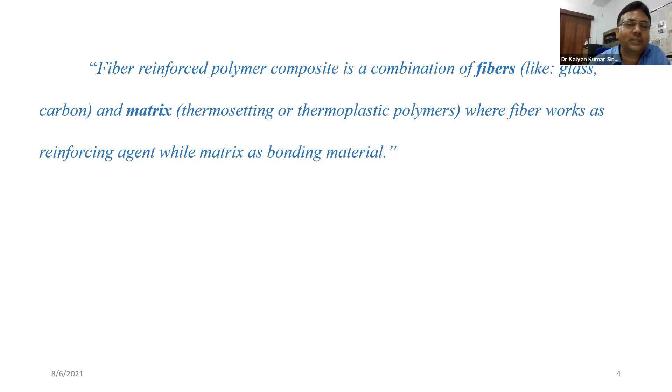If you look at matrix and reinforcements in composites, these are the two main constituents of composites. Why composites? As I told you just now, because we have limited natural resources, and we do not want to destroy them. So the answer is composites.

Whenever we talk about composites, they are advanced over traditional materials: high strength to weight ratio, good aspect ratio, and wide applications as advanced materials in industries like aerospace, aircraft, marine, and automobiles. There is a lot of design flexibility - whatever designs you want to create, you can do it.

You know that proverb: when a material scientist develops a material, who is the happiest person? The happiest person is the designer, because he can design as per his choice.

See all these parts, we are showing them for the automobile industries - all these small parts, you can make with this. Then you also have extended service life.

If you look at service life, it is also better in the case of composites. You know the fundamentals of the stress-strain diagram very well - the upper yield point, the lower yield point, ultimate point, and fracture point. What happens there? Once the material reaches the ultimate point, the fracture point, it is going to fail.

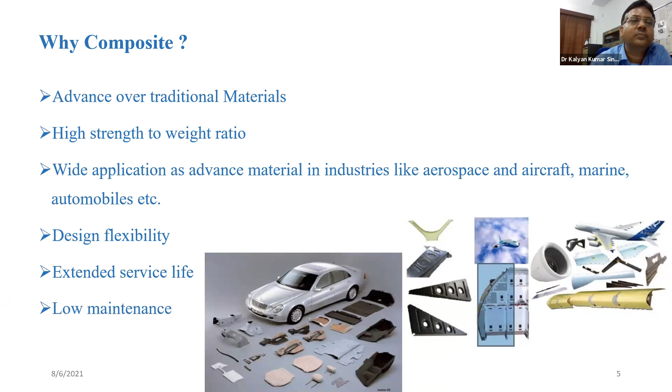Now see this impact - these happenings are practical examples I am showing you. Impact situation is a real life problem for aircraft, marine, automobile, and many more industries. Impact damage analysis can provide better design flexibility for components or structures with minimum risk of accident.

See the lower figure in this slide - this is a car, a Ford car. This happened in my campus, and I took this picture and put it in this slide. What will happen? They will go to the workshop and they can repair it. If it were a metallic material, they would have to change the complete part. Here, the designing and repair of this, everything becomes easy when we talk about this kind of part.

If you consider my earlier experience before joining CST, I worked for some time at Taneja Aerospace Industry as a material inspector.

All the flights with defects come there for repairs. Whatever parts they find damaged, they make those parts in their workshop and repair it. They have 3 industries, one based in Bangalore, one in Chennai, and the other in Nagpur. So that was the repair industry for flights.

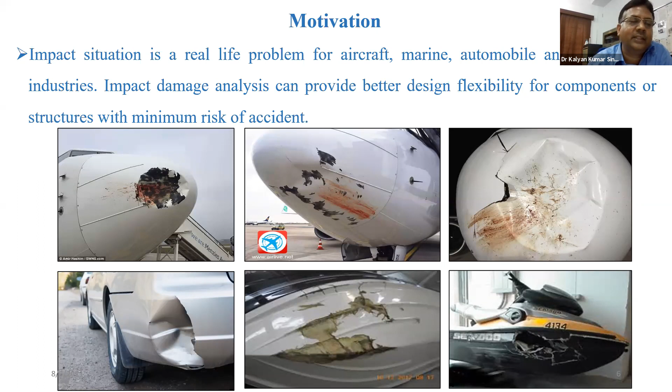So see this figure in front of you, we can easily repair this kind of incident if it happens with the flight or the automobiles.

Now, about composites and impact: a sudden instantaneous impulsive force on a limited area of composite laminates can be defined as impact. Based on the indentation velocity, impact can be divided into 2 categories: low velocity impact (LVI), high velocity impact, and also a third category, hyper velocity impact.

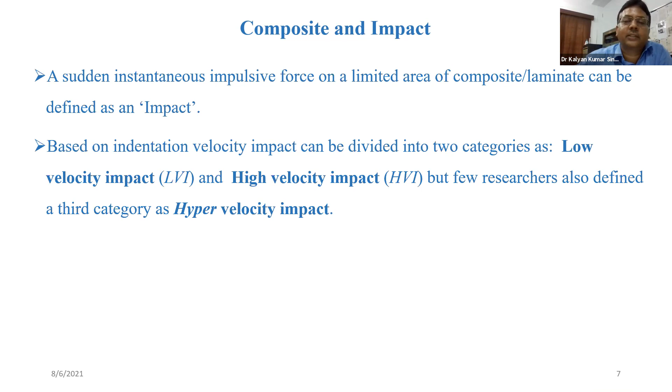A variety of failure modes can occur on impact damage, no doubt. If you recall the fracture mechanics approach, you know mode 1 and mode 2: opening mode, sliding mode, and tearing mode, and in which situations they may occur. A variety of these failure modes can occur on impact damage.

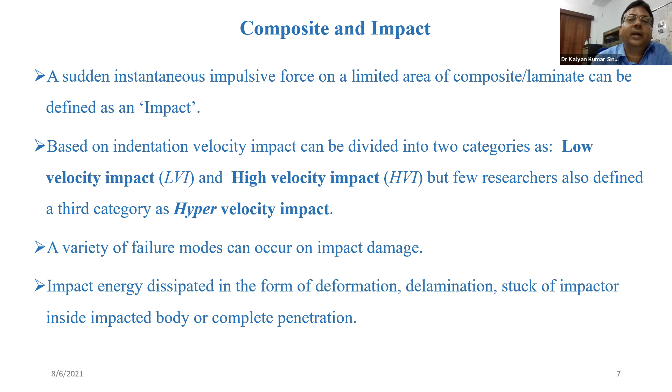The impact energy is dissipated in the form of deformation, delamination, the impactor getting stuck inside the impacted body, or complete penetration. So it may happen as anything: it may deform and stop, it may delaminate, the impactor may get stuck within the material, or it may cause complete penetration. So we cannot say in advance what type of damage it will be, it may be any type.

My dear friends, especially my dear young friends, when we talk about composites and impact back in 2004 to 2008, we were very much unaware about the damage, because we had to take the damage area and then calculate how much damage occurred. One small thing I want to introduce you to: in 2004, IT BHU had an international conference, and we presented a concept there. Once a material is impacted, we can find out how many layers are impacted.

So what we did was make a hole in that material, put zinc oxide solution in it, and burn it. When it burns, all the resin part is burnt away and the fiber remains. We measured that area and showed the audience, yes, this is the impacted area we found experimentally, and we got the best paper award for that. At that time I was in SCST.

So I can tell you, we didn't have any software for that then, so we were relying on experimental work. Nowadays we have LS-DYNA software, commercially available in the market. Many industry people use it, and we have also been using it for the last 5 years in this institute.

So now we don't simply give a talk with some experimental demonstration. Numerically, experimentally, and mathematically we can say, yes, if it is impacted, this much damage will occur. So in today's lecture, moving slowly from the basics of composites towards impact, I will try to show you the impact numerically and experimentally, correlate all this, and give you a clear picture.

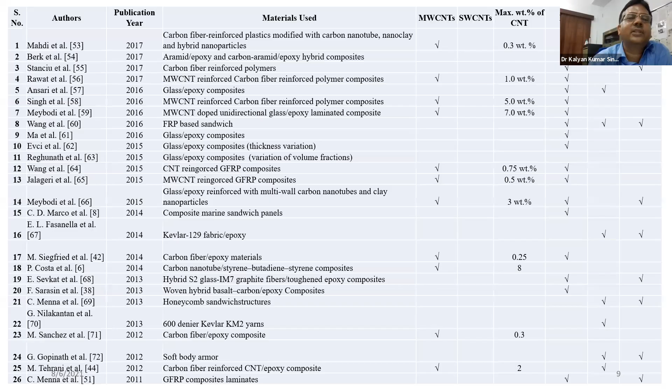So the talk will slowly move in that direction. If you see the literature survey, here it is. In the area of impact itself, I have produced 3 PhD students.

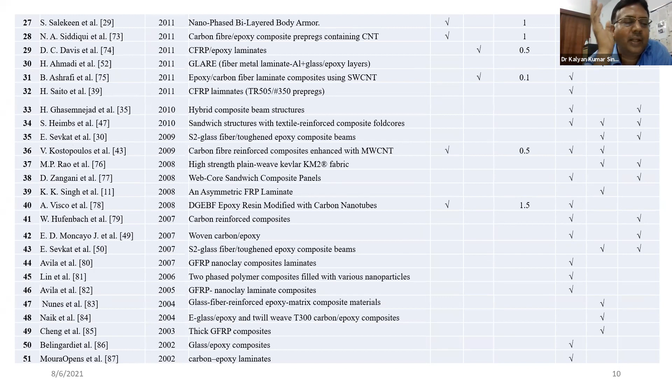I'm not putting in all those papers, but I'm very happy to inform you that one of my PhD students, who worked in this area, just yesterday joined IIT Madras as a faculty member in the aerospace department. He has also worked on the impact of composites. Mr. Prashant Rawat, also from Uttar Pradesh. Presently 2 more students are working in this area in my group. We have reviewed a lot of papers, and here we are showing a few important ones so we can correlate those papers to our research work.

What are the research gaps when we talk about this? What was done earlier? I'm speaking especially as a teacher here: if a student comes to you, what do you tell them? Go and do your work.

The duty of a PhD guide is to tell them, you start your work from this point. How to reach that? Suppose you are doing something and some other people have finished earlier, who will give you the PhD degree? So we have to first find out what could be the research gap, where my student will start the research, what other students have done. That is basically the very turning point of doing a PhD.

So literature review revealed the scattered data on MWCNT as far as low velocity impact response is concerned. See, the multi-wall carbon nanotubes, again, it is a challenging job.

My dear students and faculty members who know my labs, we are manufacturing this MWCNT in our lab by arcing methods. One MTech student worked completely for 2 years, we were unsuccessful. Finally, we took one PhD and 2 BTech students, and we were successful. So we are making MWCNT, multi-wall carbon nanotubes, in the department itself, and we have tested it. Size is 14 nanometers. I'm happily saying if the size is less than 50, we can say it comes under the nano category. So size is 14 to 20 nanometers, it is coming under that. So we are developing this in the department, in-house only.

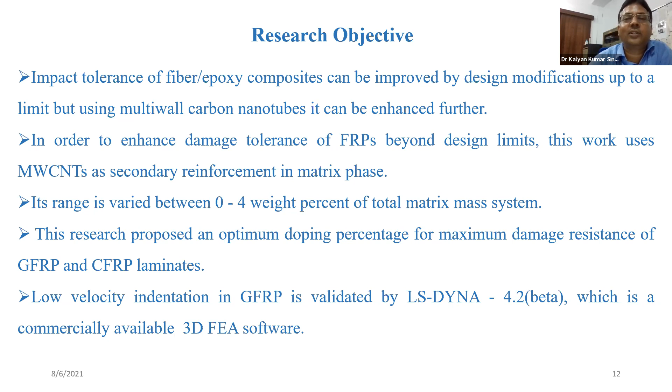Low velocity indentation in GFRP is validated by LS-DYNA 4.2, which is a commercially available 3D FEA software. In one hour of class, I have to cover this, so I try to design it in a way that I can reach some conclusion. Otherwise what will happen? I will show you so much data and not reach a conclusion. So I have shown it in a manner that I can reach the conclusions.

Now come to the fundamentals, material design and fabrication. Now, if you talk to people working on FRP, they will tell you, yes, take some layers and make the composites. How many layers? What could be the thickness for that? What is the size of the angle? So those are very important points.

So we have to do all this, and we have to see also in which case it is symmetric or it is asymmetric. I hope you understand symmetric and asymmetric, otherwise I can explain it this way. Suppose in a class, the first bench right side and first bench left side: if one boy, one girl sitting there, and the left side also has one boy, one girl, one boy, one girl, that means we can say it's a case of symmetry. If it is not sitting like that, we can say it's a case of asymmetry. So we have to see about which type of materials this is. This came purely out of one PhD student's problem. How is it?

When we thought about this problem, we honestly did not know the answer. And when we got the answer, it was very alarming. In case of this symmetric level, we are getting not only the impact, we are getting better properties in case of G1C and G2C, that means mode 1 and mode 2. This whole work together, I gave to one PhD student, Nand Kishore Singh.

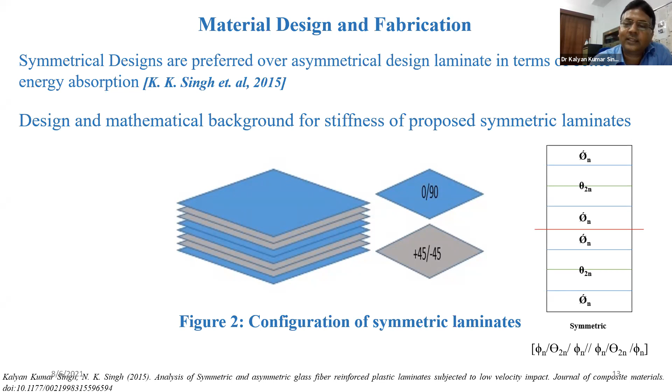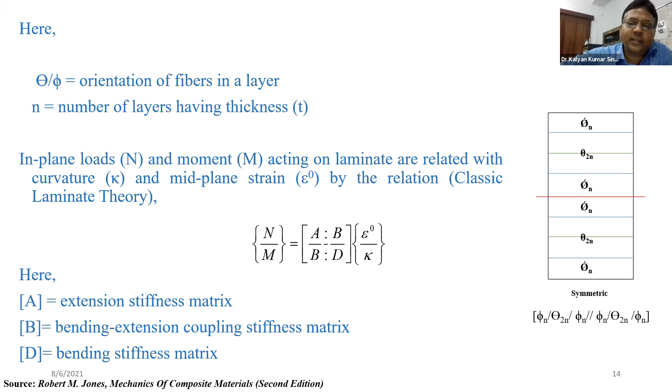So now, I have gone through this using R.M. Jones' book, Mechanics of Composite Materials. If you open that book, this is available. If you don't have that book, send me a mail, I will send you the soft copy. So this we are taking from R.M. Jones and trying to show you what happens in case of the symmetric and in case of the asymmetric.

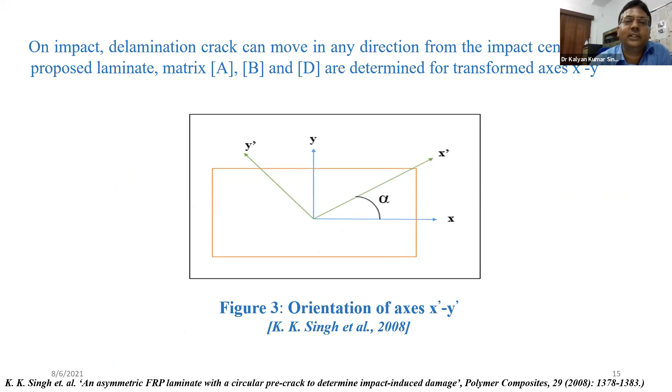And after designing, we can show this. As I was saying just now, Zk, Hk and Tk - we have taken a kth ply, and from there we have shown some of the dimensions for that. So in the symmetric case, no coupling exists between the load and the curvature, because all the components of the matrix are 0 by virtue of symmetry. I hope you know about these fundamental matrices.

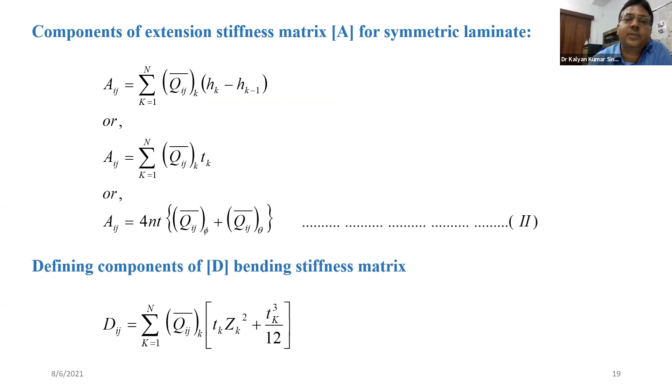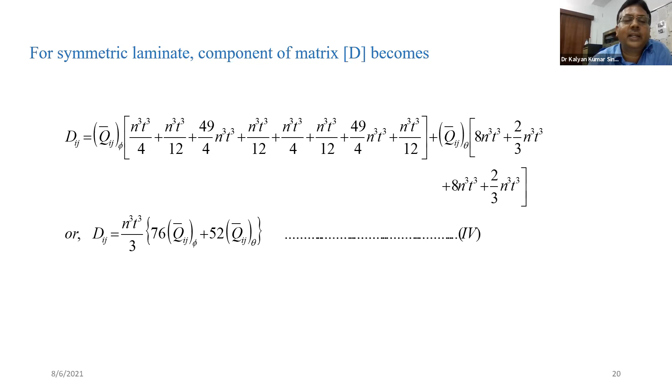Based on those basic equations, you can design your own equation as per your own choice of composite laminates. So components of extension stiffness matrix for the symmetric laminate, we have to just solve this and we get the symmetric component of the matrix by solving it. Higher orders, if any, we have to neglect. Finally, we get the Dij value. So we can calculate all this for the symmetric and asymmetric cases.

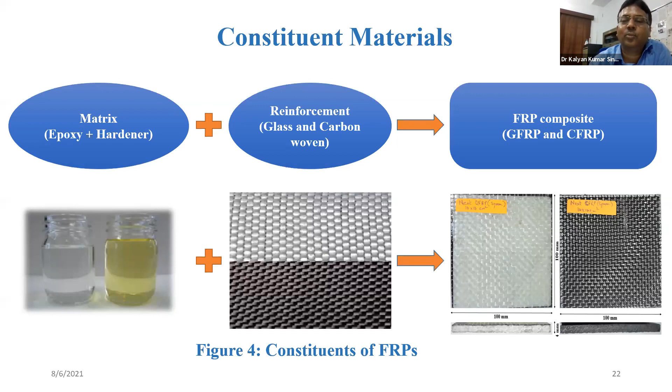Reinforcements, the fabric, the primary reinforcement - we also have to be careful about the GSM. What type of GSM are you taking? What is the material for that? If you are taking 400 GSM or 600 GSM, we are simply talking about the cloth, the fabric. So in the fabric, we can talk about plain woven fabric with the warp and weft, plus minus 45, or 0-90.

So this diagram we try to show you. For those who are new to composites, if I take this as the positive direction, this is 0-90, and we assume that. How do we go for plus minus 45 - plus 45 and minus 45? We have to make that arrangement and make the cut that way. So at 45, the next cut will come. Once you cut one piece from there, you place this piece on the 0-90 area, and you will get all the cuts at plus minus 45. Now just put all this fabric in one place. When you are making this composite, you can use this fabric.

So multi-wall carbon nanotubes is a secondary reinforcement here. I can tell you it's a two-part process - one group of students made their own, which we are using. The other group purchased it from the market - it is costly, around 5,000 rupees for a few grams. I also bought this with one group of students because I wanted to compare what we are making versus what the company is making. And honestly speaking, our material is better than what we get from the company. In this work, we took material from United Nanotech Innovations Pvt Ltd, Bangalore.

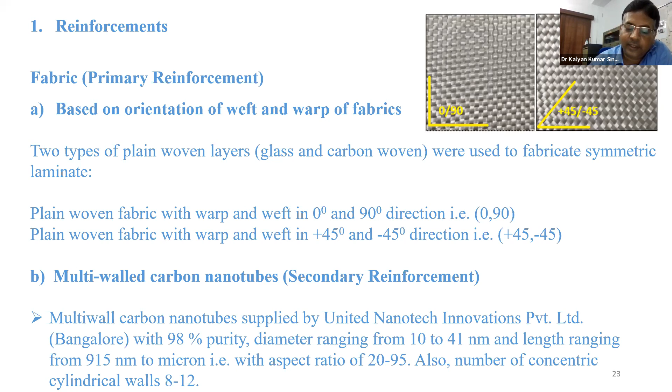We have to mix them with the epoxy systems, with the accelerator, before using on the fabrics. Once it is mixed properly, we apply it to the fabric and get the final composite laminates. The nature of the fabric may be bidirectional, and we purchase it from industries - this one developed by Dew Point Technology. We purchase it from MS Industries, Kolkata, who supply it to us. I told you about GSM, gram per square meter by weight - 600 gram GSM is provided by that.

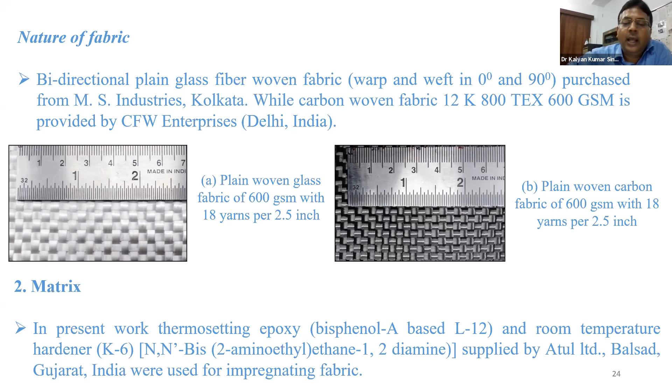In the present work, we use thermosetting epoxy and a room temperature hardener, which we are taking from Valsad, Gujarat. Now coming to the laminate fabrication.

Mixing of MWCNT in the matrix. Use of organic solvent followed by high energy homogenization technique provides homogeneous dispersion of multi-wall nanotubes in epoxy.

Now let me tell you the story behind this. We did not have ultrasonification earlier, so we were taking it and mixing it manually. How was it mixed?

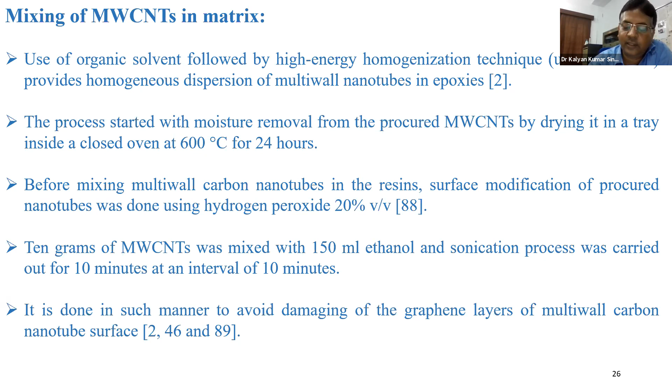I'm showing you this with references 2, 46 and 89, which are research papers we have to follow. But rather than just reading from the slides, I'm telling you from my own experience, which is better.

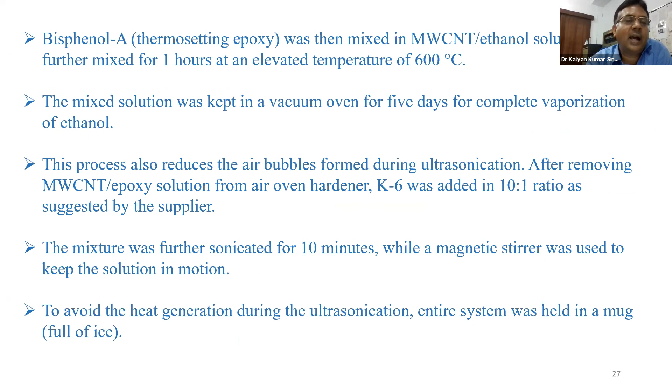We have to take this MWCNT, purify it, do the ultrasonification, mix it, and after mixing, put it on the surface.

Now see, one student is from an American university, one student from a different university, and one student from my lab. I'm showing you all three pictures and see the methods - 8 layers of glass epoxy.

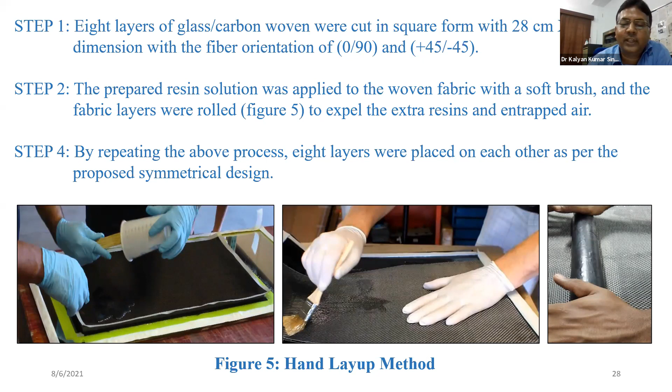So here we are taking 8 layers of glass fibers, and we have to make this - you can see the basic glass we have, on that we put it layer by layer, then we put the resins and press it to get the complete surface. So this is the basic fundamental of that.

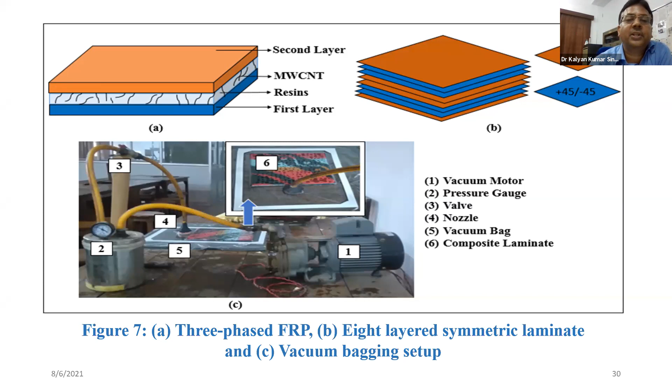Now the mechanical properties. Slowly I am entering into the impact.

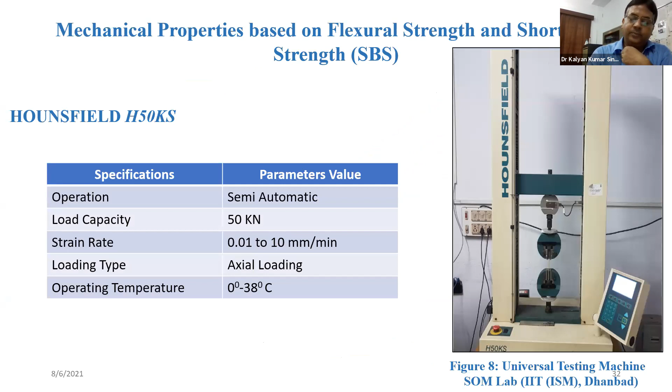Can it change and go to bainite and cementite, and change its properties? Yes, it is possible. Yes, it is possible. Now here it is not possible because this is the case of FRPs. But the beauty of FRP is that they talk about upper yielding, lower yielding, or critical points. They are going to explain it again.

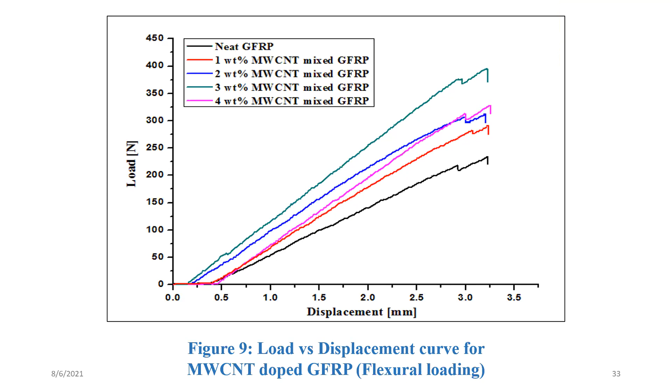Hello. Somebody is talking. No. Okay, please, look at it here.

I have told you just now, so layer by layer it is going down, again taking the load, again going down. This is going to the first layer. The number of layers is 8, so what will happen is this happens 8 times.

Then it is going to fail. See here, 1%, 2%, 3%, 4% MWCNT weight percentage, and see what is happening with this graph.

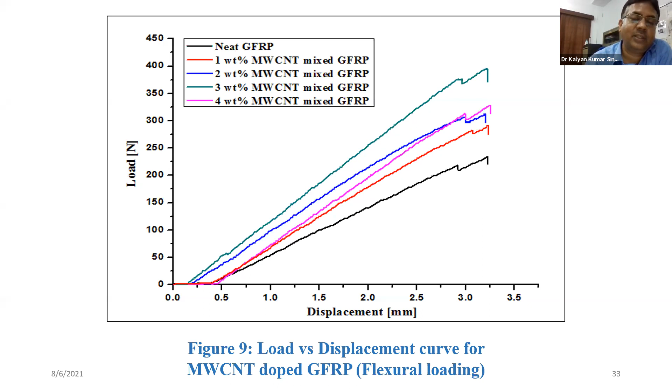Now, before going further, I'm not entering into the impact test first, because these are the data we required for the LS-DYNA software. Now see here, flexural test.

Flexural test with 1%, 2%, 3%, and 4% - we have to add this as well. Now here we are getting the best result at the 3 weight percentage in the flexural results. See how the mixing of the MWCNT is very important here.

Now look at this figure. This figure I cannot forget, because during my PhD I made one mistake here. I want to tell you about that mistake so you don't forget it. Because whenever the size is small, the material is going to take the load - we have to ensure the material takes the load, not the machine.

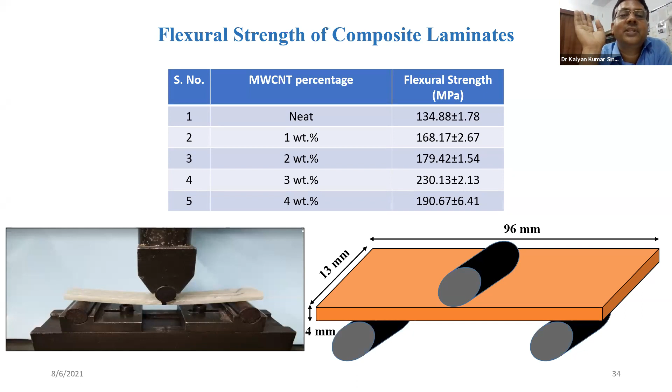Here the specimen size is very small. Most of the time we make the mistake and the machine takes the load instead of the material. So my dear students, when doing this type of test, please be careful and ensure that when applying the load, the material should take the load, the machine should not. Then your result is a success; otherwise the result is not useful and you have to repeat it.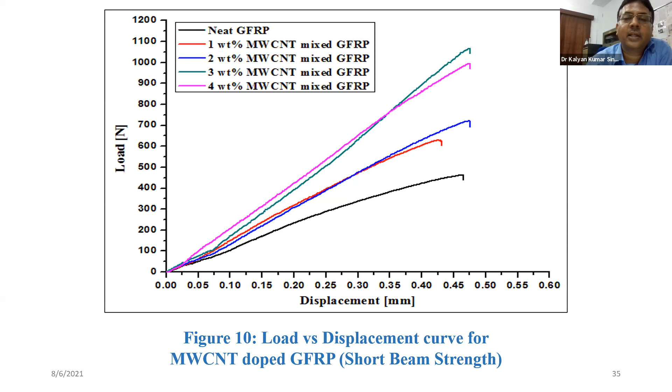Now you see this load versus displacement curve for the MWCNT GFRP short beam test. This is the graph - I've just told you the information, and this is the graph. You can find out how much it shows for the different weight percentages of the MWCNTs.

So if you see all this basic information, now we are entering towards the drop weight impact testing.

This machine is not with us. This machine is available in IIT Delhi or IISc Bangalore, so we do this test in IIT Delhi, taking help from there on a payment basis. That system is there - we can pay and use those machines in different IITs.

So now this is the machine, from Instron, that we are using as the drop weight impact tester. The beauty of this machine is that the impactor takes the impact, and after the impact, when it goes back and returns, the magnet will hold it. So we can avoid repeated impact - this is the beauty of this machine.

If you see most of the Indian machines available in many labs, they don't have this feature - if you do an impact, it will repeat. Like a rubber ball you drop on the ground, it will bounce 2-3 times. So here in the composites, once the impactor hits, it will slowly cause a repeated impact.

The beauty of this machine is that once it impacts, the impactor returns back and is held by the magnet. So we can avoid the repeated impact and get the correct data.

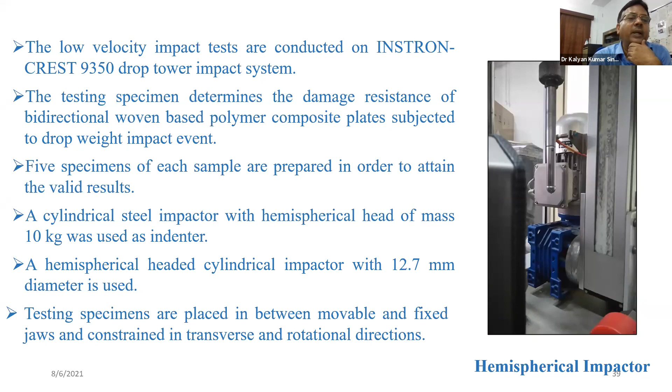So now coming to one by one: the first one is GFRP, glass fiber reinforced polymer composites. Here we'll see the GFRP laminate and find out what happens when we use GFRP.

Testing of the multi-wall carbon nanotube GFRP laminates at impact velocities of 3.5, 4.5, 5.5 meters per second. Drop weight impact test of the glass woven epoxy composite reinforced with multi-wall carbon nanotubes, ranging 0 to 4 weight percentage resin, were tested in order to find an optimum MWCNT loading percentage, with 8 sets of samples. As I've told you, to reach a conclusion we have to do many tests - see here, 0.5 weight percentage, 1, 1.5, 2, 2.5, 3, 4 weight percentage.

Then we have to give some other group a certain weight percentage because we need the complete set of data. Then you can say this is the output from your lab. Otherwise, it is very difficult to say anything by testing just a few specimens.

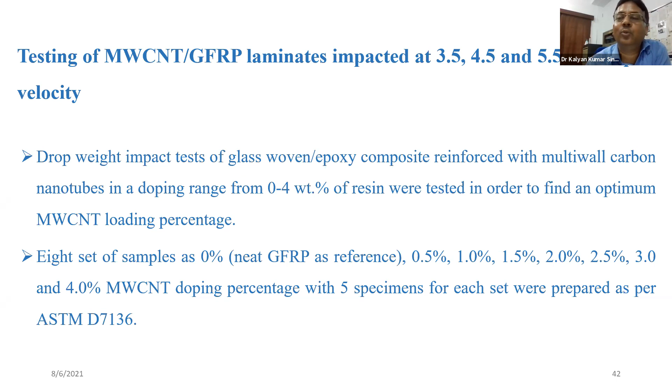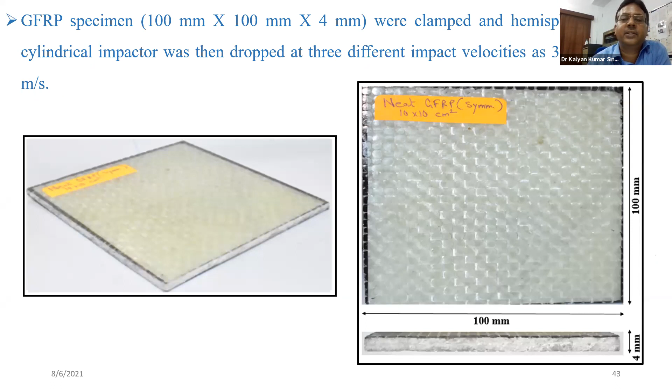See, this is the glass fiber. The material is ready now in the department itself. Now, once this material is ready, we have to go for the testing.

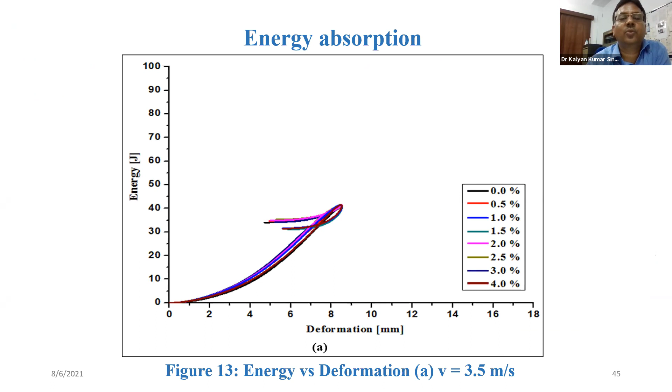If you summarize all this, you can say the total weight percentage behavior is very good at 3. Sometimes it is better at 4 also, but most of the time it is best at 3.

Now the very good question I can ask you, instead of you asking me, I am asking you: when the weight percentage is increased, what could happen? Why does it show less favorable behavior? The answer is the crashing nature of the polymeric composite material.

Once it is cured using this MWCNT, after a certain weight percentage, it does not show the earlier behavior. It's the same as when you always talk about nano.

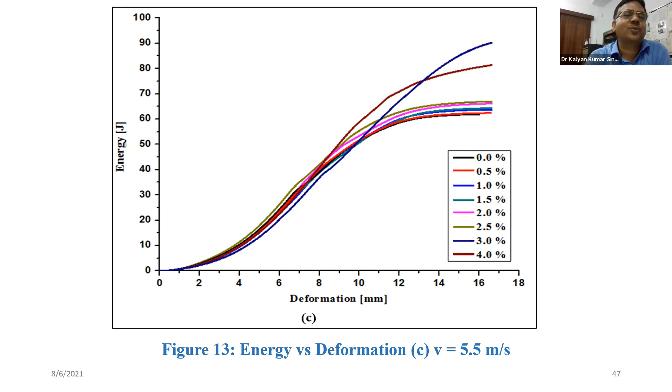Why not talk about mega? Why not talk about tera? What is something special about nano? Now, what is the answer for that? The answer is that at the nano level, the mechanical properties of the material are optimum. Before that, there is no use talking about or using it.

So you see, nowadays nanotechnology and nano materials are very popular. You can ask this cross question to yourself and find out the answer. I am telling you some good books to refer to. We get some of the best mechanical properties at the nano size level; after that, it starts to deteriorate.

So nano is very popular with mechanical engineers, forget about chemistry and chemical scientists. Here also we are talking about this: due to the crashing nature of polymeric materials, simply increasing the weight percentage of multi-wall carbon nanotubes may not be fruitful. This is the answer from my side.

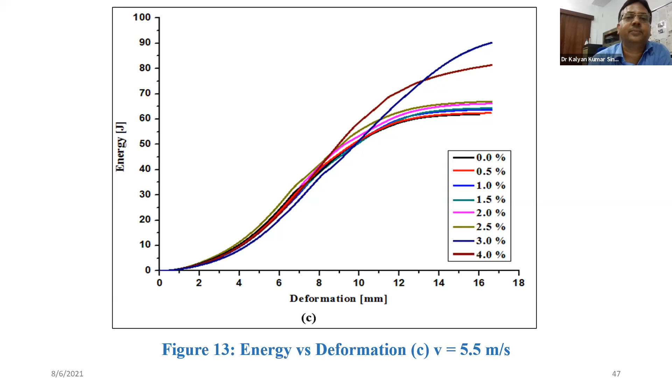We have to just find out this impacted area. We have to calculate that area and say how much area is damaged. By knowing all these different weight percentages, the maximum absorption energy was found to be 74.2 joules and 91.2 joules at impact velocities of 4.5 and 5.5 meter per second respectively.

You can say, sir, why not go beyond 5.5? After 5.5, I did not test further. I should tell you the correct information.

As a scientist, researcher and professor, we should tell you the correct information about what is happening in the lab and what data I am going to show you. It may be that the material is going to deteriorate, because at 91.2 joules, if you directly go to penetration, then there is no use doing the test on these materials.

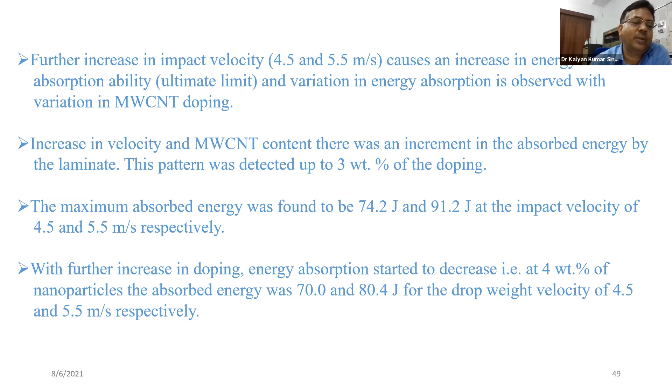Now, with further increase in the doping, energy absorption started to decrease. At 4 weight percentage of the nanoparticles, the absorbed energy was 70 and 80.4 joules for the drop weight velocity of 4.5 and 5.5 meter per second respectively.

See the load versus time curve, how it shows from 0 weight percentage, meaning pure material without any MWCNT mixed in, up to the 4 weight percentage.

Now look at it, what the force-time-displacement graph looks like when the velocity is 4.5 meter per second. See the different types at 5.5, what happens. I'm showing you 4.5, 5.5, and 3.5. Look at the first crack in this figure, see the first crack here, see the first crack here.

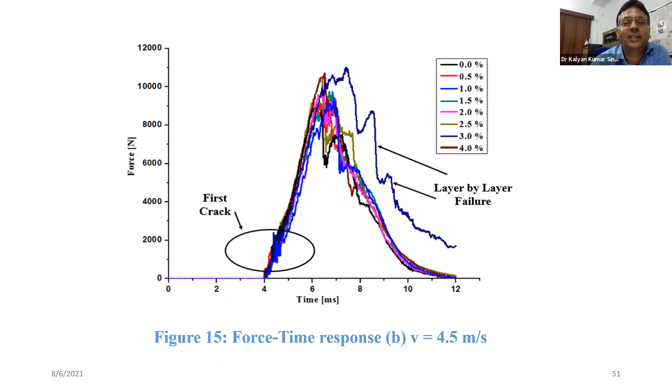See, after getting the first crack also, the material is taking this much load. So what happened with that? This is the beauty of this composite material. So why are we talking about the composite? Well, this is the beauty of that.

Even though the crack is initiated, see, if you talk about the crack, first the crack is initiated, then the crack is propagated. Anybody can understand how the crack is propagated, but it is very difficult to understand how the crack is initiated. It may be composites, it may be mild steel, it may be cast iron. How is the crack initiated? So many things may happen.

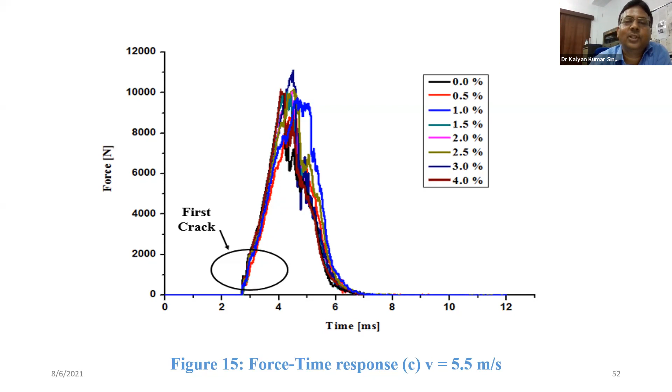I hope you remember all this information, because this isn't just my lecture, I cannot bring all this. But just think about what happened with the cast iron, what happened with the mild steel, what happened with the composites. How does the first crack initiate in all this material? If you think about it, you will feel very happy, because you can talk with the material, so you can find out how the material behaves after the first crack, once the material is loaded.

So with the increase in velocity, the time required to reach the peak force decreases, and the composite's response pattern after reaching the peak load is different. So like this, I have to just show you that. This is written in the slide.

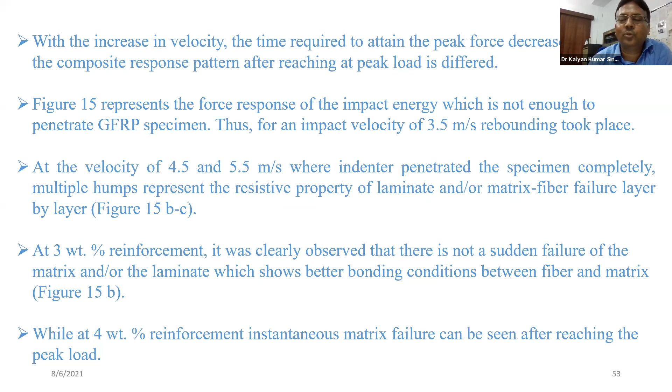Now see, this is from the initial 10 years of my research. I'm still using this, I cannot say I'm not using it, but see how it was earlier. And this is the output for that.

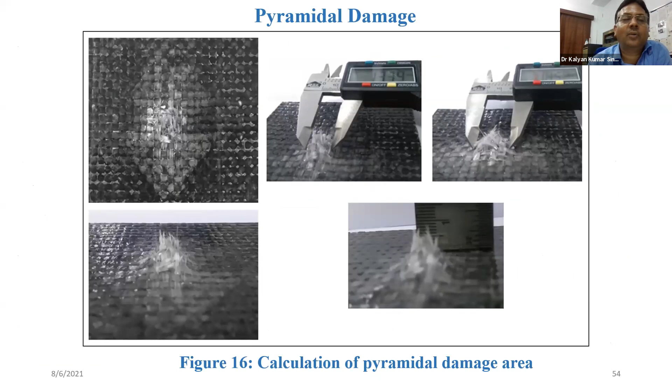Now, how is the research done experimentally, we have to find out. So now see the damage area comparison at 3.5, 4. I have shown you so many graphs, so this is the complete chart for that. Here you can see how much damage happens at 3.5, 4.5, and 5.5 meters per second, in terms of percentage velocity of the impact dropping weight.

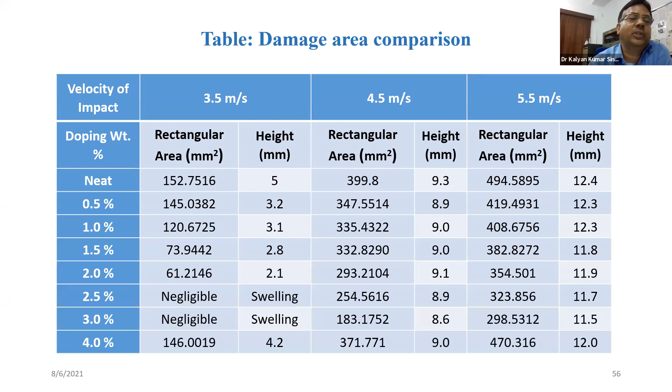Now the validation of impact testing of GFRP. So in these materials, we have tested at about 3.5, 4.5, and 5.5 meters per second. The model assumptions are no viscoelastic effects, and the impact occurs only in the transverse direction.

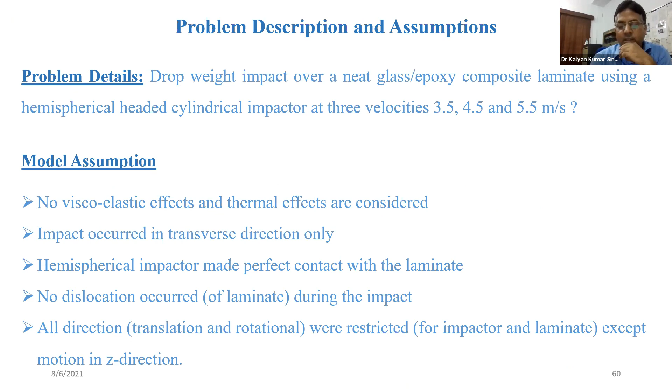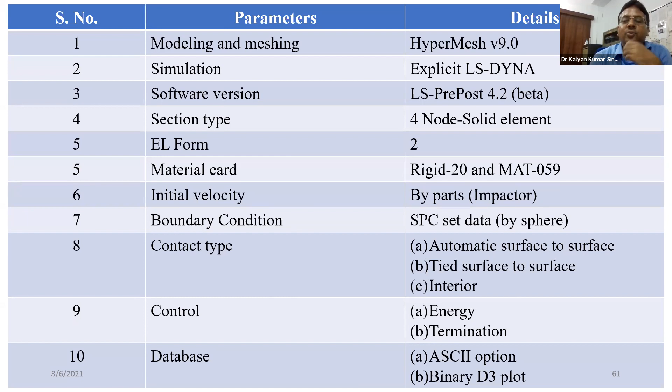And these are some assumptions we have to make here, because now we are slowly entering LS-DYNA. So we are making this using LS-DYNA software, and it's available. I hope many of you know about this, if you do not know, please use this software. It's a good software especially for impact analysis, so we are also using this software, and we have to test it.

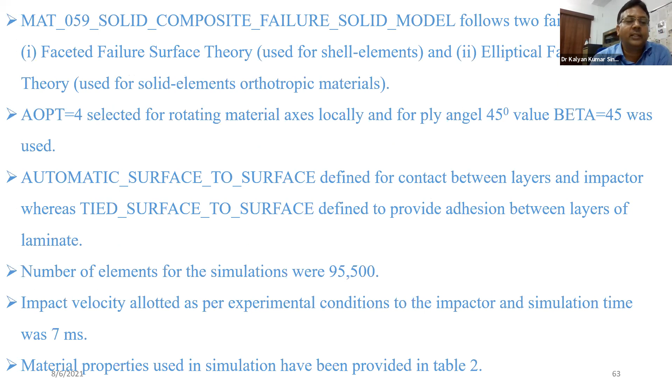And these are the data related to some information. What are the elements of the simulation? We have to take the number of elements for the simulation, which were 95,500. So this shows you that. First we have to draw the basic materials, then you have to impact it. I told you earlier that some information is required, these are the information required.

See this, PPT slide 64, this is Young's modulus. Young's modulus, you have to see Poisson's ratio, tensile strength, compressive strength, and shear strength. So it's slide number 64, there you can see on the right side, table 2, material property.

These are the data. How can we say what is the meaning of this software? Software is just designed based on our mathematical equations. So we require all this information from the experimental work. You cannot leave experimental work and do only software, you cannot call that complete research. We have to do this experimental work, use the software, and validate it. Then you get the answer from the software and you just validate it. You cannot imagine how happy you will be to see those results.

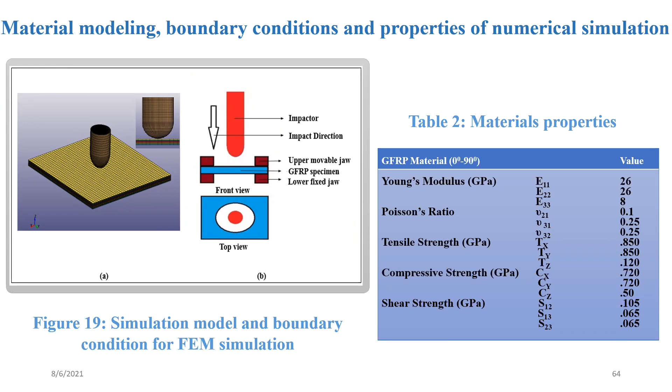So once you see this, these basic results we are using for the impact testing. Now see the damage area.

So in this impact research, I'm going to say that we have to make this material, do some mathematical equations, experimental validation, numerical analysis, and also see some of the metallurgical aspects, how it behaves in the metallurgical form.

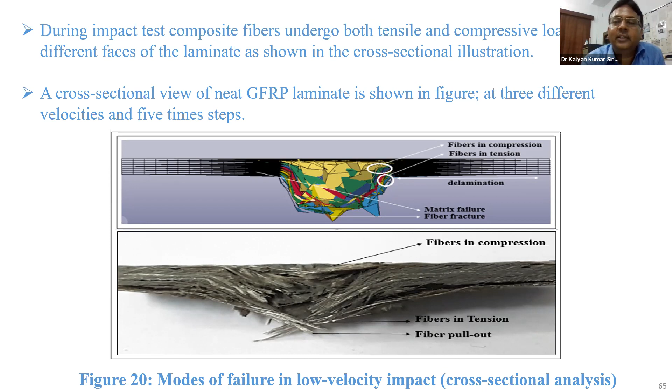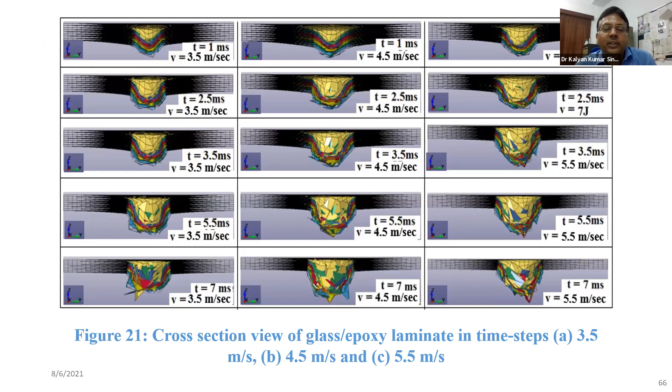See now, this complete picture is in front of you. So the velocities are 3.5, 4.5 and 5.5 - cross-sectional view of the glass epoxy laminate for the three different cases. See the damage area here, how much it is showing by using the software.

My dear friends, if you see any research paper, if the variation between experimental and simulation value is less than 10%, it is acceptable. If it goes below 5%, it is very, very good - I can say it is very good. If you say it is 100% equal, then understand maybe there's something wrong with that, maybe the data is manipulated. 100% equal is very rarely possible - 99.99% it is not possible. So there should be some variation between the experimental and simulation value, and this value is in front of you.

So now look at it here again - also some more damage area in the FEM analysis that I'll start to show you.

Now going to the same thing with carbon fibers. So earlier one was the glass fiber - this glass fiber. Now the fiber is going to change, the fiber is carbon fiber.

Basically, the carbon fiber is costly but has good aspect ratio and more strength. If you see the cost, one glass fiber of 1 meter by 1 meter costs 200 or 220 rupees. If you see 1 by 1 meter carbon fiber, the cost is 2,500 rupees. So the carbon fiber is costly compared to the glass fibers.

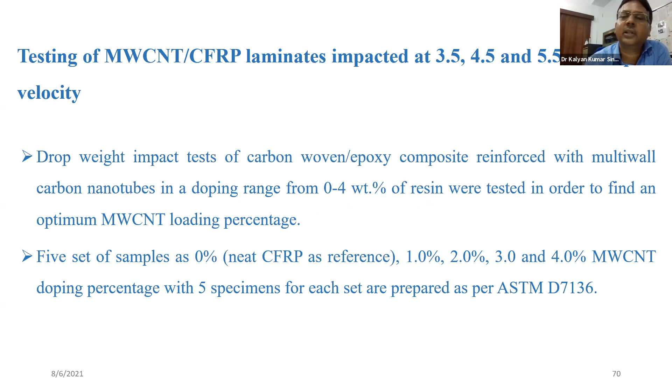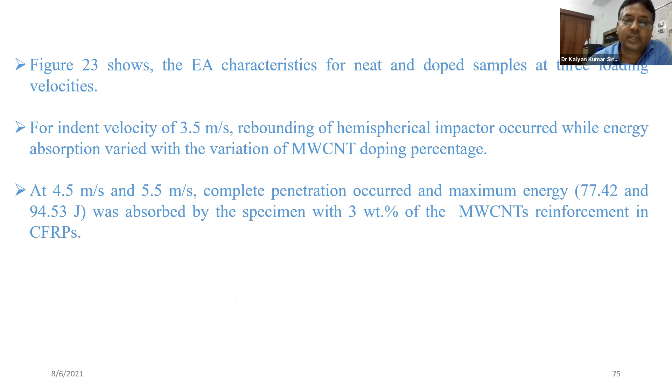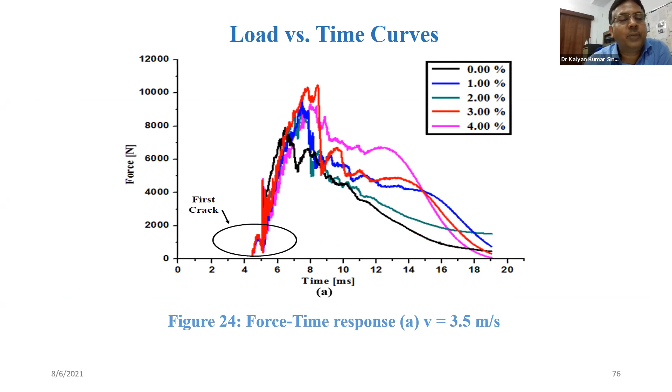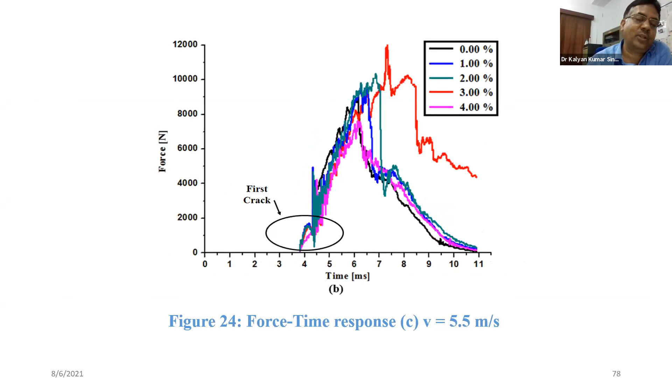See at 3.5, what is happening? The material is going to fail at the first crack, then again the material is able to take the load. Now see at 4.5, the first crack is initiated, and again the material is able to take the load. See at 5.5 here, again the material fails but is able to take the load.

Now, from the load versus time curve, you can find out how much optimum load this material can sustain.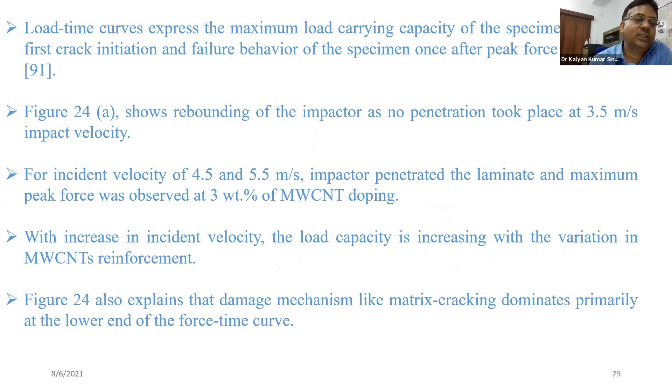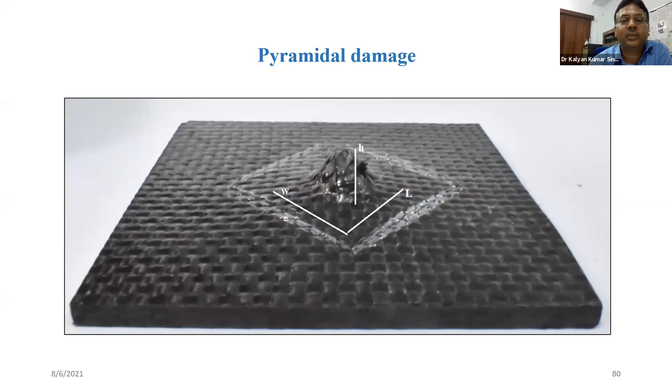This is exactly the experimental way the material gets damaged by our impactor in the machine. See here, 1%, 2%, 3%, and 4%, and the velocity is kept constant because you have to compare it properly. You cannot compare at 3 meters per second versus 7 meters per second. So to compare carbon fiber with glass fiber, we have to keep the velocity constant at 3.5, 4.5, and 5.5 meters per second.

And this is the data we got after doing this. See this beautiful graph, how it is. It was normally impacted and then scanned at IIT Bangalore.

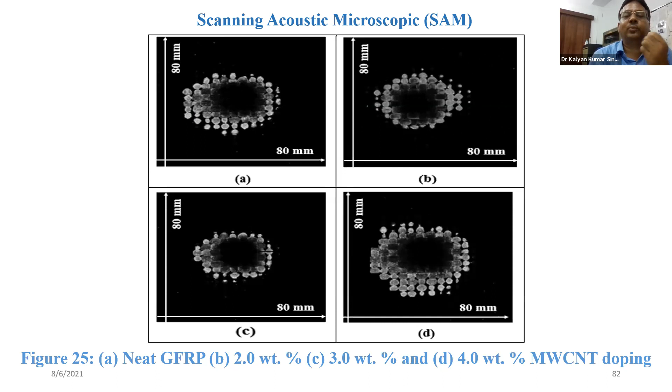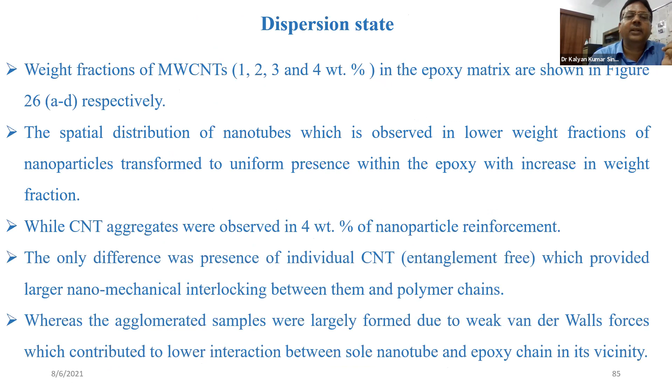Now this third part is completed. I'm entering the fourth part: failure analysis by fractography. After the material fails, we use the FESEM machine, and very recently we have added TEM as well at IIT Dhanbad. Using pictures from the SEM machine, we can see how the multi-wall carbon nanotubes are dispersed on the surface, or whether they are accumulated in one place.

So from this information, if you look at this material and that material, you can see it's 1 weight percentage, 2, 3, and 4 weight percentage. Now look here at 3 weight percentage. See the carbon nanotube dispersion here. See the carbon nanotube dispersion. By looking at these graphs, if you have a little knowledge of the microstructure, you can find out how this behaves relative to the original properties of the material.

Whether it's impact, fatigue, G1C, G2C, or whatever mechanical properties you're going to add with these materials, by looking at this you can demonstrate it here.

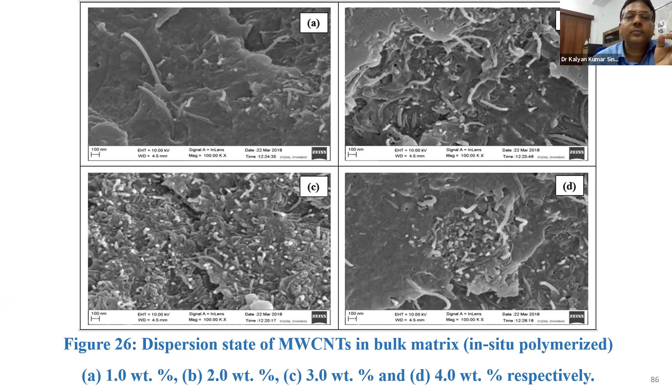So look here: the dispersion state of MWCNT in the bulk matrix through in-situ polymerization, at 1%, 2%, 3%, and 4%.

From this graph you can find out the different types of shapes. For MWCNT, very recently we got one structure that looks like a cauliflower; we have to make another one that looks something like an FCC structure. So we are getting very different types of structures here, and we have to summarize all these figures and data and send them to the Indian Institute of Metals journal, which is also an SCI journal.

In this group, we had one PhD student, Chaudhary from BIT Sindri. It is published without any comments. That paper is published, and this morning I got a mail that the DOI is also coming for that paper.

See, once you give something new to the market, people will happily accept this. So this is our new research from our lab, showing the good research. Once you publish your data in Q1, Q2 journals, SCI journals, not conference papers, we also look at your paper. If it is published in Q1, Q2 and Web of Science, good journals, then you can say your research has some worth. So all this is very recent from us.

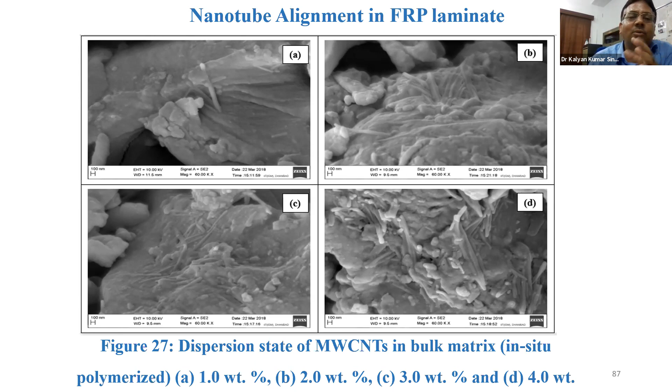Now look at this, I told you there may be some problem. See, the agglomeration takes place here. So if direct impact comes and hits this point, the answer is something different. So we have to see about this, the fourth pillar of my research group, which will give more information to my research group.

We have to complete MWCNT dispersion properly, in a complete good manner. If it is not dispersed properly, we cannot say it's good. So we have to also look at this point when we start doing research in this area.

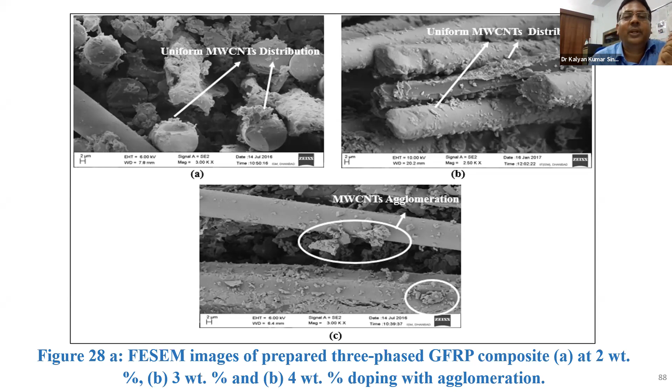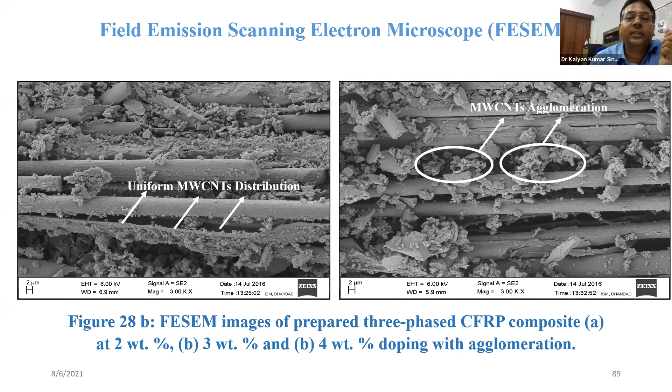This is the facility we are also using, showing the problem where it is, and also the beauty of the research - not only the problem, but how we are making good materials in the department itself and showing all this. So now we can state the conclusion for that.

Many points are written in the conclusions, I can tell you. The flexural strength is improved by 71% at 3 weight percentage reinforcement of MWCNT as compared to the neat GFRP. You see about different types of things, but looking at this, we can say this process is better.

Vacuum assisted, VARTM - what do we call it? Vacuum assisted resin transfer molding. So there are many methods available here.

We have to see what could be the best method. When I was doing my PhD, I prepared composites at IIT Kanpur using the pre-preg method, because in the pre-preg method, the fiber volume percentage is maximum - we can get more than 50%.

Some people talk about advanced composites. What is the meaning of advanced here? Is it just decoration of the composite? No, it's not decoration. Advanced composite means the fiber volume percentage - if the percentage of fiber is more than 50%, then only you can call it advanced composite. If fiber is less than 50%, you should not call it advanced composite.

So when we make composites using pre-preg methods, we get fiber volume percentage more than 50%. Nowadays we are not using those; we use the vacuum assisted method, hand layup followed by vacuum assisted methods, or hand layup followed by heating and pressing molding machines. Using these methods also, we are approaching 50%.

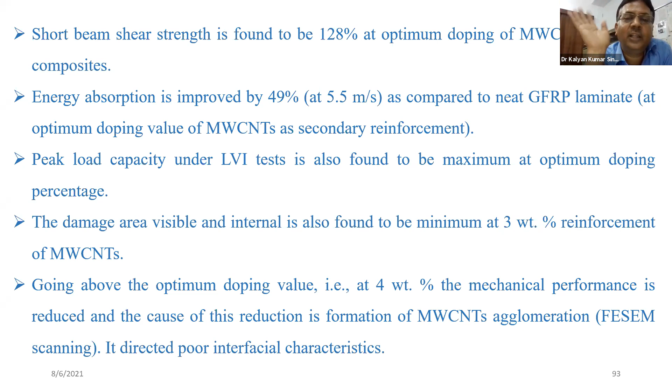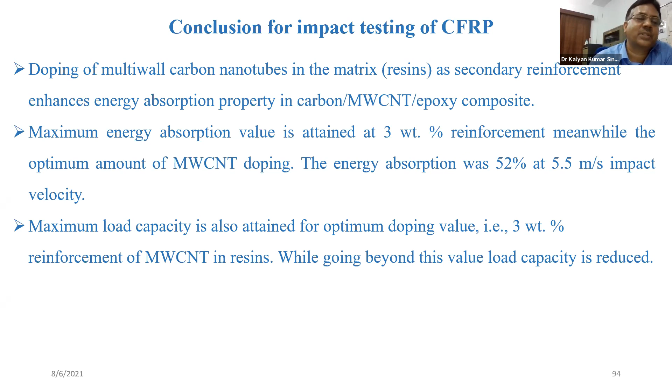So now here it is 4%, why it is reduced. I have told you just now the agglomeration nature of this material. This is the output and the conclusion by Dr. R.K. Singh from DMSRDE scientist. So about this area, if you see what is happening inside the material, what is happening after impact, what is happening during the impact, those things if you visualize and compare, you will feel very happy to see all these results. So the doping of multi-wall carbon nanotubes, whatever I'm explaining is written here. 52% when it is 5.5 meter per second. The maximum load capacity is also attained for optimum doping, the value is 3 weight percentage.

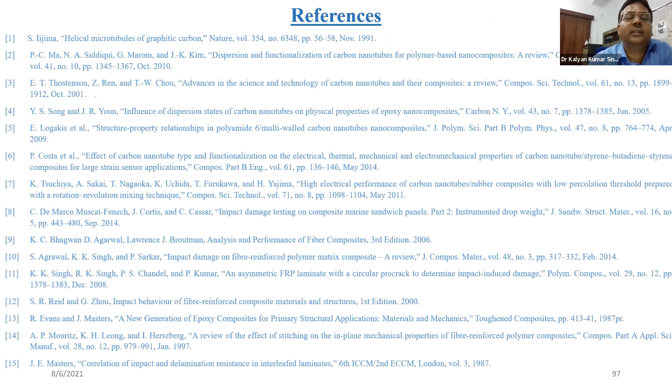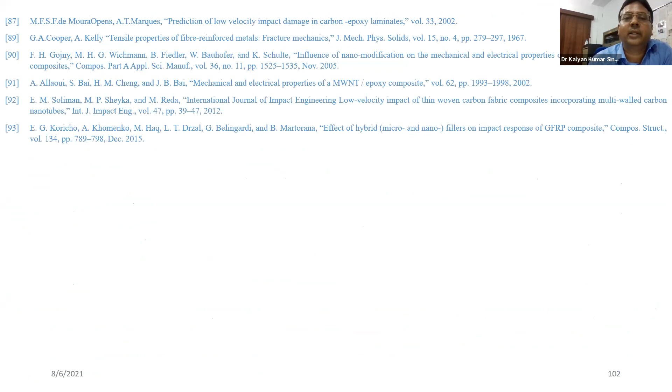That people can do, there is still so much work to be done. These are the references, and including the conference publications, the output from our group is 150. Only in journals we have more than 100 papers.

And see, this last slide is very good. This is the first paper, you can see it, it is asymmetric FRP laminates. If you enlarge this slide, you can find the name of Hindustan College of Science and Technology. This paper I published was named HCST, and it is published in 2008, but submitted in 2007 with Hindustan College.

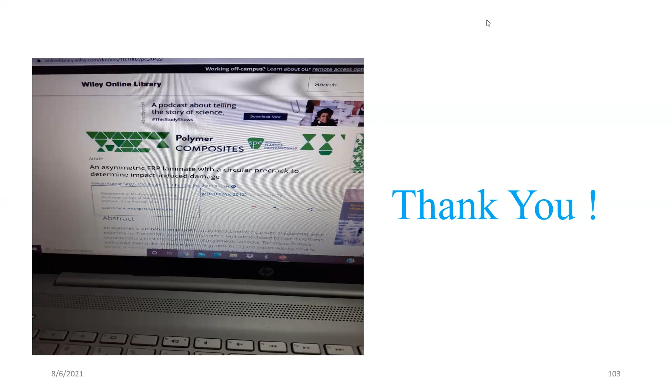This is R.V. Officer from Methodist College of Engineering and Technology, Hyderabad. The topic which I have taken for the presentation is really excellent, and we got very useful information about your research works also. Actually, this MMC we have taken into consideration for friction stir welding, sir.

Yeah, that's what I told you during my presentation. I told you initially, if you see the industries like Taneja Aerospace Industries, Swaraj Mazda Aerospace Industries, Tata Motors, and one of the US industries, they also contacted me as they are making helicopters. Nowadays they are using carbon fibers, not multi-wall carbon nanotubes. If you look at research from 5 years back, some people were using it but not specifying the percentage. So we tried to find out what happens at 0.5 weight percentage, 1 weight percentage, 1.5, 2, 2.5, 3, 3.5, up to 5. After 4 weight percentage, what we found is that sometimes it starts to deteriorate. Yes, it's going to deteriorate, I told you that.